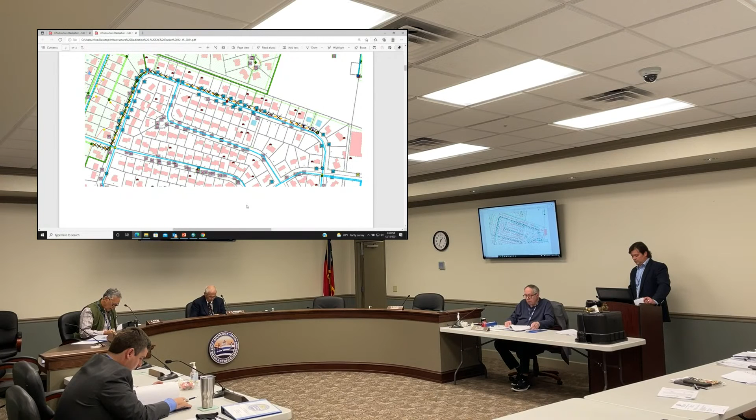I found it kind of interesting when I looked at this. What'd you call it, Pediatric Surgery Center? Dentistry. Dentistry, okay, that's right in the middle of a subdivision, even though the driveway's on Altama. It's kind of interesting how that wound up, but that's a city issue, not mine.

So this is literally just the section from the edge of the right-of-way to connect to the public system. Yeah, we asked that question too, and they were even successful in getting a curb cut. I think they were just outside of DOT jurisdiction, and they squeezed it in there, but hopefully it won't affect the residential area right there.

Is this close to where we did not reline that pipe that we were going to reline, across the street? It is. Now, we do have a separate motion for this one over the other one, though. We did, but the way the motion's read, I agree with Commissioner Duncan, we could probably just say it was already approved. So we're going to call that one approved as well. Okay, great.

That's a very nice looking facility that's out there now, the dentistry office. Is that it? They can charge more money.

Next item is the USGS joint funding agreement. Since 2014, we've been entered into a joint funding agreement with U.S. Geological Survey to study the migration of a salt plume in the Upper Floridan aquifer, and the migration of chlorides throughout the system. This is key for our long-term planning to determine if saltwater intrusion is causing any issues. Several years ago, we had to close down the Perry Park well site due to the increase in chlorides.

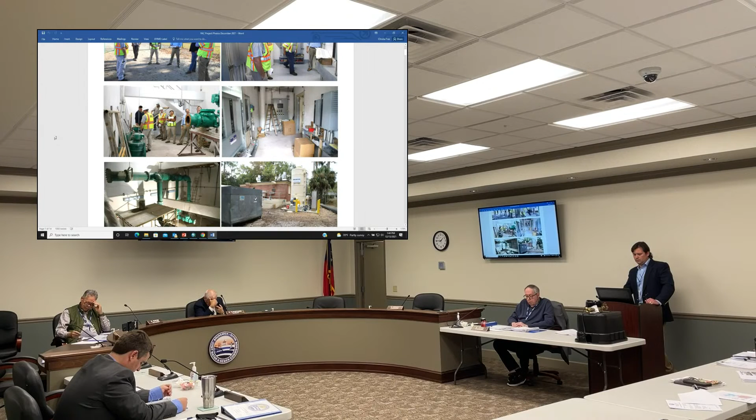Project 702, pump station 35 and 36. We talked a little before about it. This is a walkthrough meeting we had, a few pictures of that, electrical room, whatnot. This is before the pumps arrived at 35. We're down there in the dry pit room, electrical room middle right. At the very bottom, it's looking down at the dry pit or pump room where the pumps are going to situate, and that's the discharge piping, the green piping.

Then outside is a shot of the BioRem, which is the brand, but the odor control tower. It's also part of this project. Pumps for 35 showed up Monday, and the pumps for 36 showed up today, so we've got all the pumps on site now.

Bottom right-hand picture, are those power roof ventilators? What's that on top of the roof? That is ventilation, yes. Are those fans? Are they the blowers? Yes, sir, for air exchange. Those are just exhaust fans, aren't they? But are they like power roof ventilators? I've never seen something that looks like that.

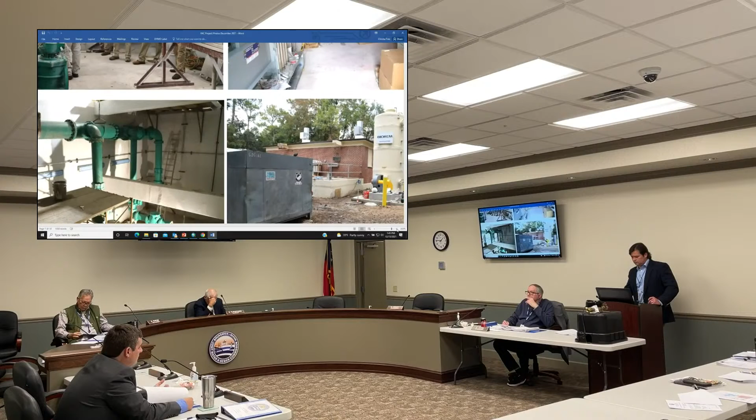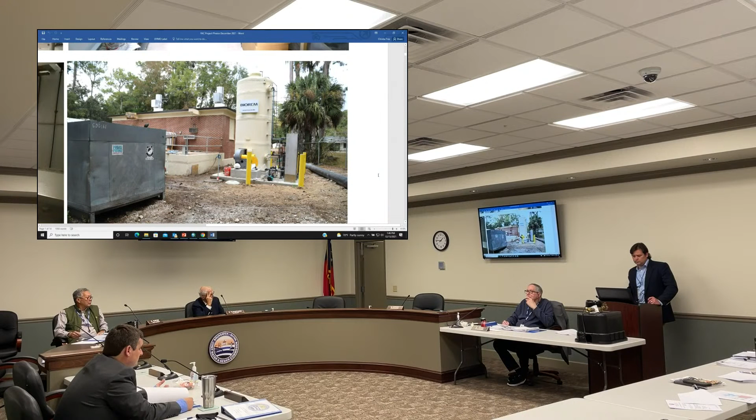Well, a little at a time here. Oops, wrong way. Other way, there we go. Can you zoom in? Have you zoomed? I'm at maximum zoom, Captain. There you go. That's as far as we can get in this picture, but we do have more pictures, we can get some better pictures.

Now, what you don't see here is also, there's a solar panel up there now, a couple other things, up on top of the roof. It's actually on that beam right here. The solar panel, what's it for, what's the purpose? It's to keep some batteries, some backup batteries inside, charged.

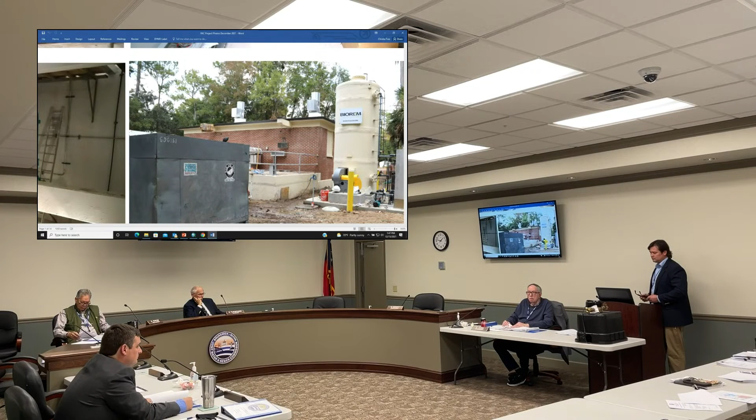Yeah, for SCADA and whatnot. Is that standard equipment now, the solar panel? It was engineered and designed into this one. Is it going to be at 4036 too? Yes, sir, it's going to be done the same way. Does it do any emergency lighting also, or just the batteries? No emergency lighting.

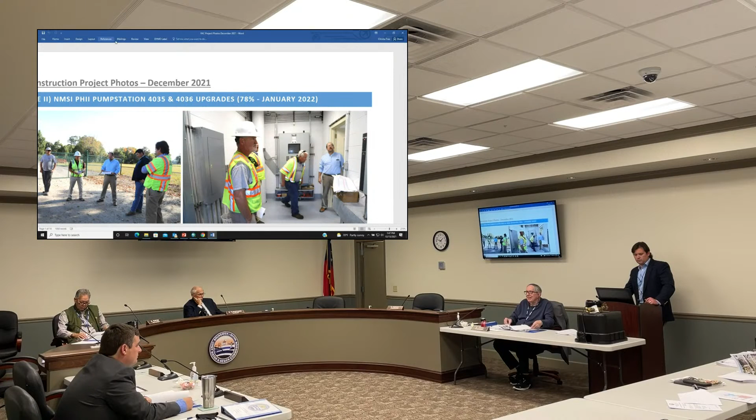All right, now you got to unzoom. Yeah, let's see what I can do here. Back out to, there we go.

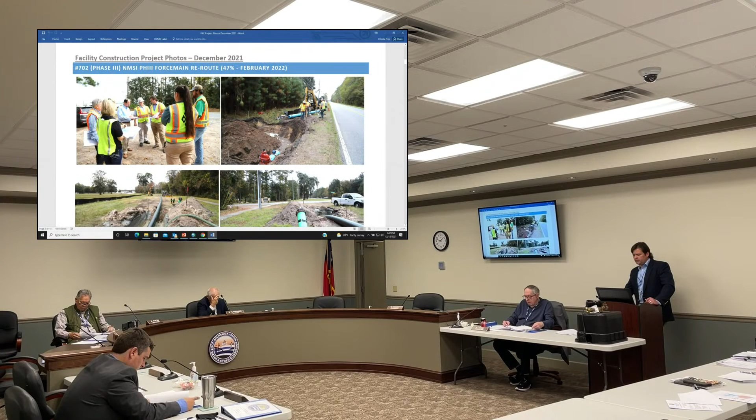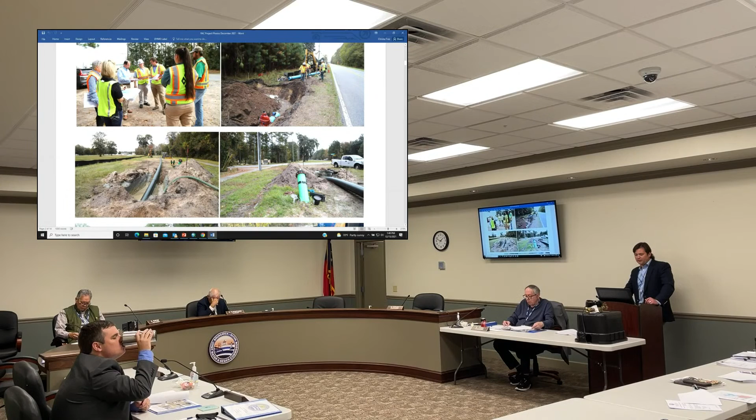Okay, and related to project 702 is the force main extension. Again, this is just a typical project, bi-weeklies out there. You can see construction going on, pipe install, force main install going in along Canal Road. This segment of Canal Road is currently 2-lane, it's going to be 4-lane, so as part of our design we had to accommodate the county's proposed plans. So you'll see fittings and zigs and zags in our water line where there's no conflicts at present, but the county assures us one day there will be.

And the force main pipe, you can always tell the difference between, at least the way we specify pipe, green pipe is sewer or wastewater, and blue pipe is potable water. So the two pictures in the middle, you can see the force main going in, another one stubbed out.

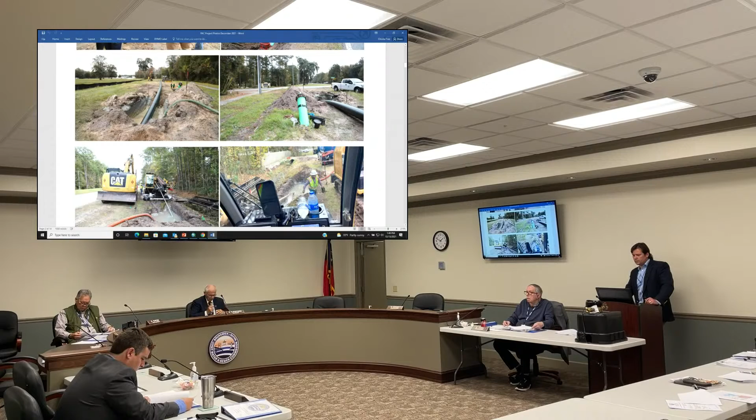Did they use some of our pipe and pay us back on this job? Because I don't think we loaned any pipe on this project. They didn't get delivery on some of their pipe, that held things up. We offered to provide them with some of our inventory pipe, but their pipe showed up in time, so they didn't use any of ours. And the pipe is all the same color? Yes, sir, because at first we were concerned we might have different color pipe. It's all C900 for the water, 12-inch C900, and the green pipe for the 12-inch, and then the green stripe pipe for the 20-inch, 12-inch HDPE that they pull through.

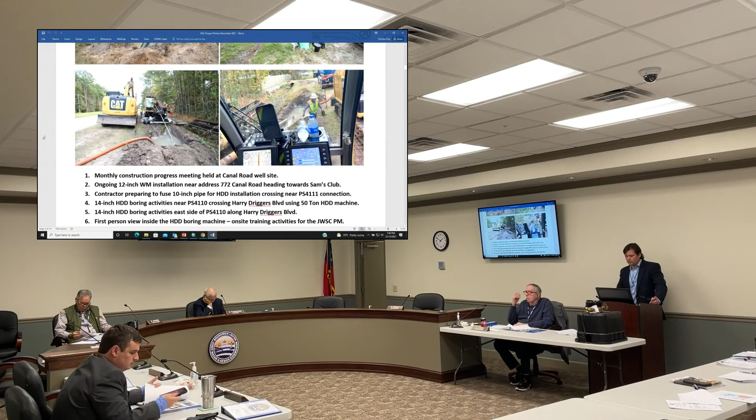So that's their smaller machine there. That's a 100,000-pound machine. And then they're going to bring the big machine, which is the 100-ton machine, coming in here to do the final pulls underneath Glynco Parkway and the last other couple pulls through there. So it's pretty neat. It comes in on what looks like a semi-trailer when it comes in. It's literally that big.

But that's ongoing right now over by Air National Guard. If you go out there right now, you'll see them out there working. So just a few more feet to connect the water main on Canal to where the storage building business is.

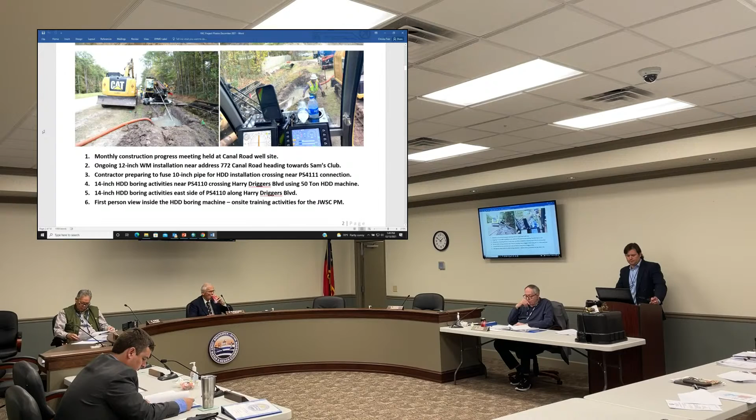Okay, next project is 704, which is the water main project happening in the same general area. This is the water main connection from the Canal Road, Harry Driggers, Glynco intersection to the water main that's there by the airport, across the entrance from the airport. This is going to loop that system in. TB Landmark, same contractor. The project was bid out.

We got pricing and whatnot. Same contractor doing our drilling on the North Mainland project, also put these two stub-outs underneath the FLETC driveways. And that job's complete now, just some final testing.

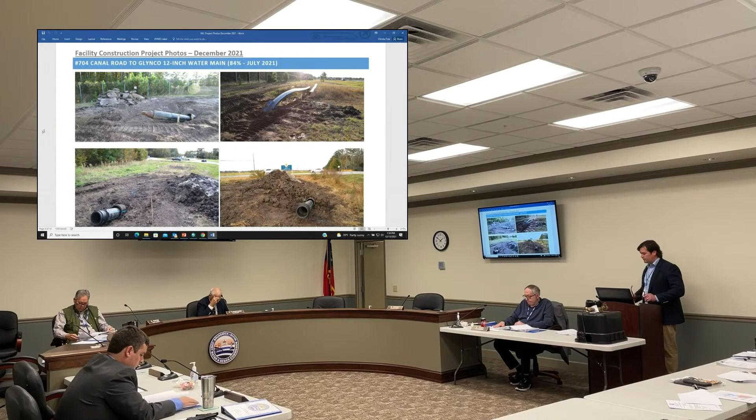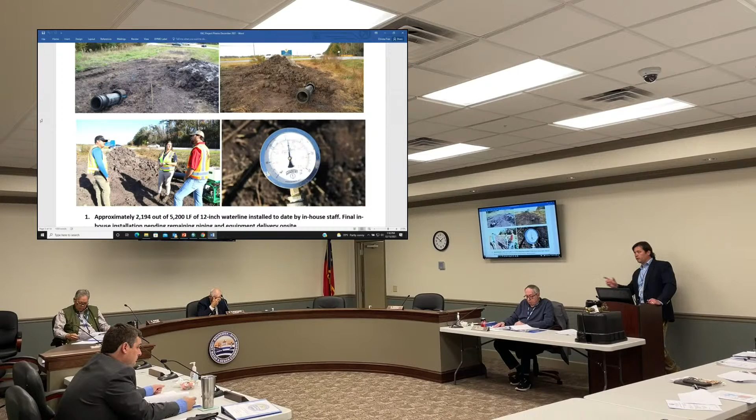They've been all pressure tested and everything like that. We're working through the bacteriological testing for those now. And once these guys are out of the way, in-house forces for water distribution are going to make the final direct bury installs to connect these all together. Overall, it's an in-house project.

Okay, project 906, Academy Creek improvements. Yes, sir. So we've finally had stuff start showing up, which is a good thing. On the picture there on the left, they're starting the install. You can see the new live bottom bin at the top of that picture, sitting on the surface there.

Fixing to be ready to be installed. That is to offload the sludge from Dunbar and Southport. The canopy has been installed over the filter structure, and it was almost complete yesterday, so I suspect it is complete now.

They've also been demoing the existing gates in the splitter boxes, and we did have some gates show up, so we've got new gates in splitter box B, new gates in the headworks, and they've installed, even though it's not hooked up yet, new gates in the new splitter box on the pre-aeration. So gates started showing up, so we'll be able to put clarifiers 1 and 2 back into service on Monday, which will be a great benefit to see how those new feed wells and baffles will assist in that.

The primary effluent lines leaving the splitter box are being installed, but they ran into an unexpected electrical duct bank. There's some 480 in there that's got to be rerouted so that we can continue the dig there. It did not appear to follow any plan, because based off the way that duct bank was poured, I can't imagine any engineer drew that.

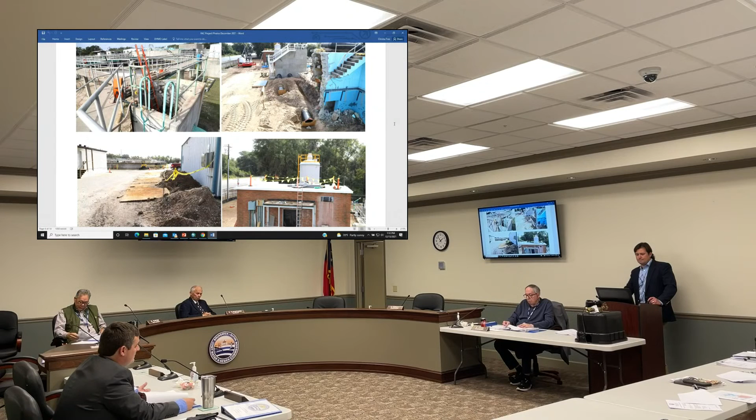The filter structure is essentially complete. A little more electrical that's got to be done there, but we're waiting on the Aqua-Aerobic rep to be freed up to actually do startup, which theoretically will be sometime in January, so the filters can be brought online.

But we do have the gates installed there now, so we could start that out. The gates for the filters have not been installed yet, but to my knowledge, they're here. We just can't do startup until the end of January, so they've started working on some other items since they don't want to have it just sitting there.

You mentioned the 480 volt circuit that was found. After we finish this major renovation, are we going to have an as-built that shows all the discoveries? We will have a new as-built that shows the discoveries, so that the next time we do something, we'll have better data.

The 480 volt line we found went into the bottom of the old grit chamber. There were some blowers down there, but it's not needed any longer because that structure has been torn down. So we just have to go back to the switch gear, flip it, disconnect, pull it out, and then they can rip the duct bank out.

We also have to provide some 110 power out to the flow meters on the influent that were being fed out of the bottom of that building, but that was already going to be done. So they're going to temporarily provide power for the flow meters because maintaining that is a permit requirement while they're doing the work. Our electrical sub is working on that now.

So there are blowers underneath the old grit chamber? There were blowers, yes. Probably, if I had to assume, they're being recycled for the copper out of the motors right now — those windings are valuable. Sure, that's true.

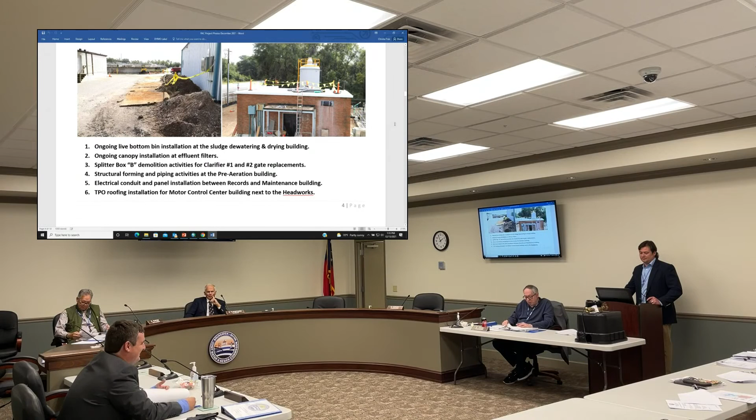So the completion date here is really just based on — completion date right now is end of March, early April, but full disclosure, that is 100% dependent on when the screens show up for delivery. And when I say dependent on the screens, they can't do the odor control installs until the screens are in place, because they have to custom cut the odor control covers once the screens are in place. So most of the work at Headworks is held up by those screens.

I'd say if we get this done by early summer, it'll still be a great success. Luckily, we allowed them 18 months on the contract to start with, even though they really only needed 14 months, so we've still got plenty of time in the contract at this point. Hopefully we weren't going to need it, but it looks like we may at this point.

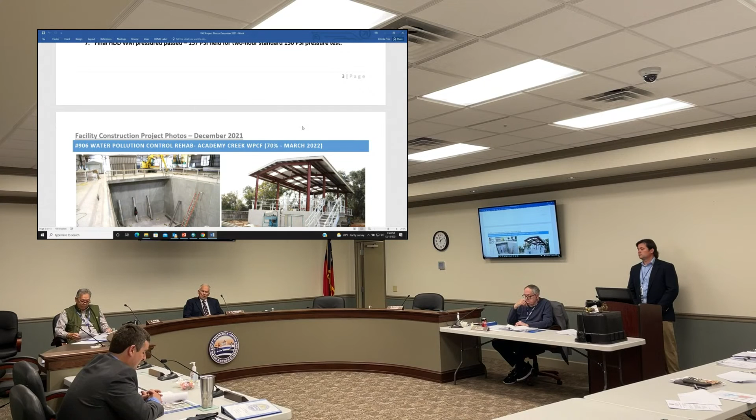Update us — there's two other things we're considering here, the admin building and also the UV system. For the UV system, we ordered a change order to the engineering contract last time to design that. They're writing up an owner-procured equipment RFP so we can get proposals to review and purchase that. Talking with the existing contractor, it's going to depend on whether they still have plenty of work to maintain that whole time, or they may want to demobilize, and we may have to bid that out separately to get the UV system installed.

For the admin building, I spoke with them about this literally yesterday, and their preference is — they're still interested in doing the job, but they think it'd probably be better for both parties if that was just bid out separately rather than trying to change order it to them at this point, because they think it's a different style of work requiring different resources, so they would recommend us just bidding that out separately.

I will say, part of the reason I think our contractor feels that way is they just won a very large contract up in the Savannah region. So they're having some of those resources that they were keeping for us — but some of those resources have since been reallocated.

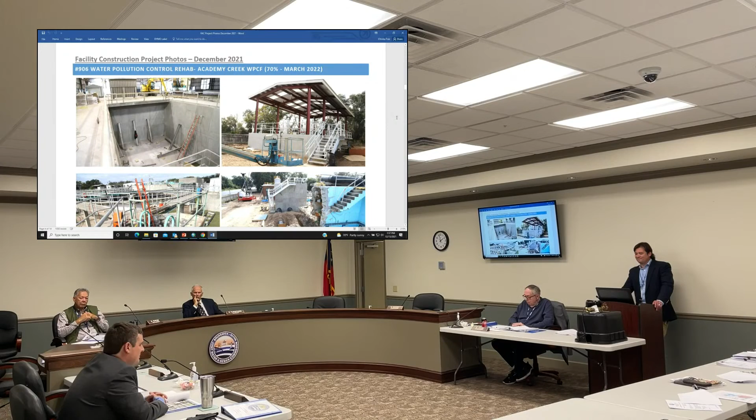However, we're still keeping our site superintendent, Mr. Allen — he's still going to be there. Good deal, as long as he's there, we're in good shape. That's good, he's a good gentleman there.

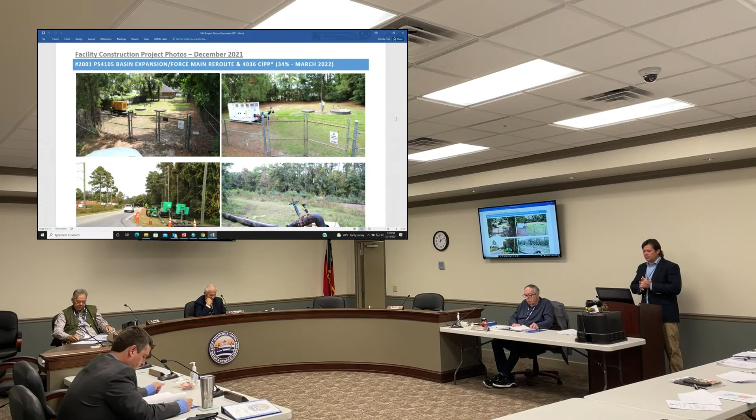All right, Pump Station 4105 basin expansion and 4036 CIPP. So we spoke some more earlier about the lining work going on for that project. These shots here are of the bypass by Rich Products off of Glyndale — that's one of the bypass setups there they were pulling from.

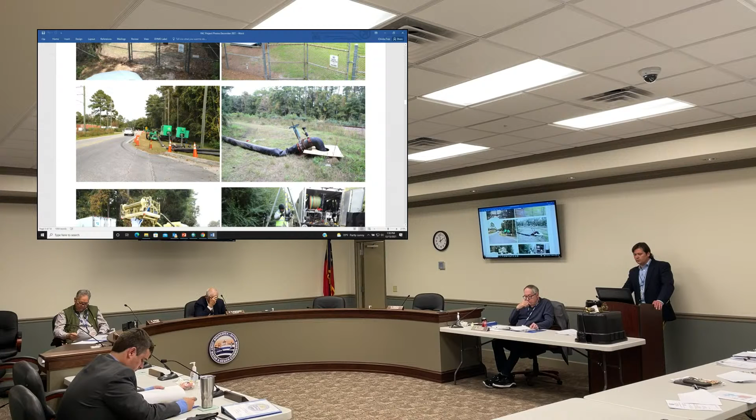You always have to bypass the sewer around the lines that you are lining. What you see here is a discharge point, in the middle left picture, discharging to a gravity manhole alongside the tracks right there. Just south of here is the trestle that goes across the canal, to give you a location. That's the setup you'll see, and you'll see it tonight as well — if you drive through exit 36 tonight, you'll see something very similar to that.

They have what they call reefer trucks, where they keep the cooled bag — the resin-impregnated fiberglass liner — nice and cool until it's ready to install. This is how they do it: they invert the bag, kind of like taking a sock and rolling it inside out. As it rolls out, it moves forward through the sewer pipe, and then your liner is there. Then they fill it up with boiling hot water and cure it that way.

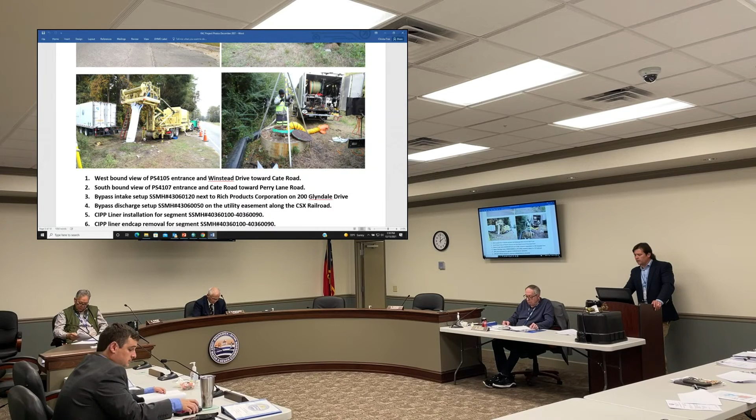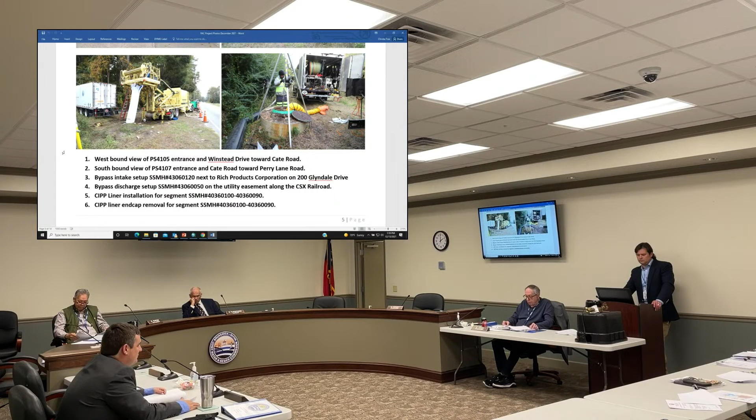So a lot of things have to go right, as you can imagine. That is a fabric material, and you can get wrinkles and whatnot, so it takes a lot of care. They do also other CIPP you can do with UV curing or steam curing, but on these size lines, really the only way to do it is to fill it up with boiling water and let it cure. So they take a while to fill up a 24 or 30-inch pipe and hold it for cure time. That's why some of these take 24, 36 hours to actually line, because it takes a while to do 500 feet of 30-inch pipe.

All right, next project, Bergen Woods off-site force main. Our force main is all installed and in the ground. They had one little testing issue on the very last segment, the connection to the receiving manhole at Cate Road, and they resolved that. They found where the leak was, repaired it, and got a passing test on the force main, so it's good to go now.

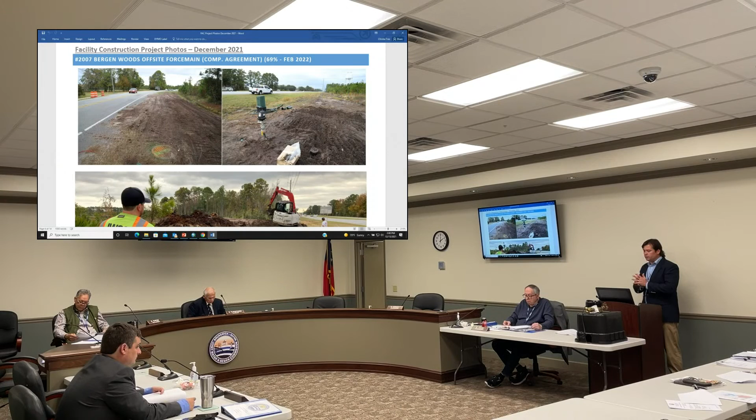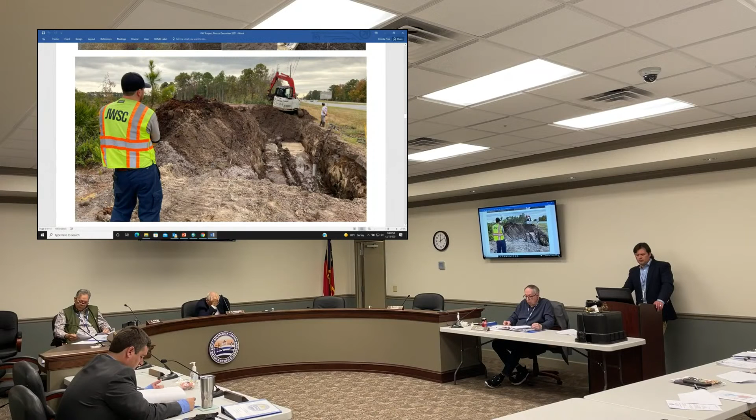The top right photo is an air release valve. All it does is allow the gas that gets trapped to escape. Sometimes the gas that comes out of the wastewater stream collects as a bubble in the force main, and these relief valves just allow that bubble to escape so that your fluid movement isn't impeded. The middle picture is Mr. Taylor, one of our construction inspectors, watching the final tie-in construction going on there, right in front of Bergen Woods, where they're tying it back into pump station 4116.

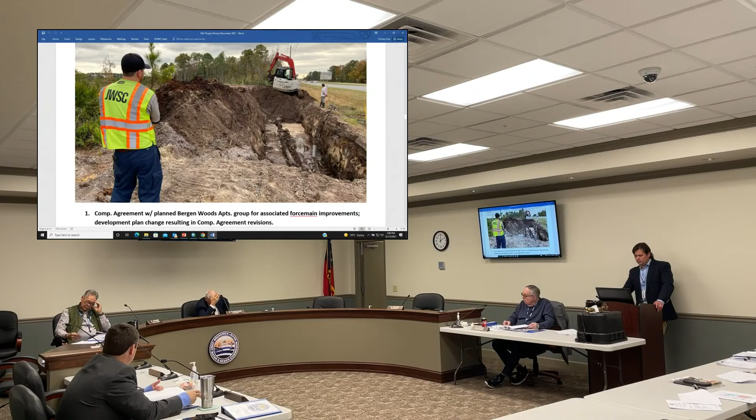That tie-in's been made, right? Yes. So I'd go back to the air release valve. Yes, you got the air release valve. What's the green box behind it?

There are two options we use with air release valves. Sometimes they're installed underground in a manhole structure, a precast concrete structure, and sometimes we allow the use of pedestal types. It looks like a telecom box. So that box goes over the pipe sticking up there? It goes over the ARV, yes, sir. Correct, it'll go over that, and it's kind of like a hot box in a way too. It's a vented box. Do we have a filter or something on that too?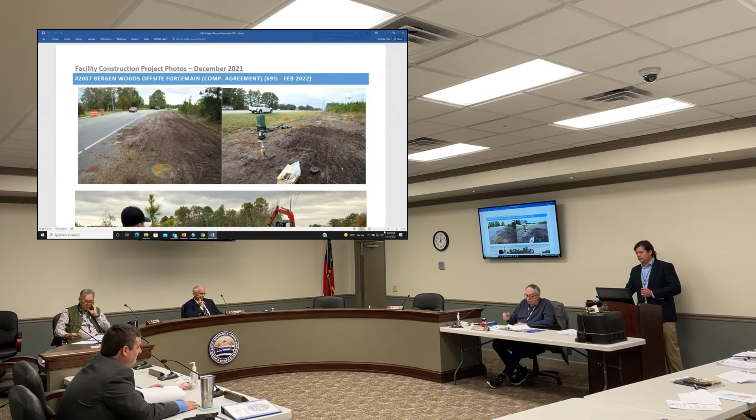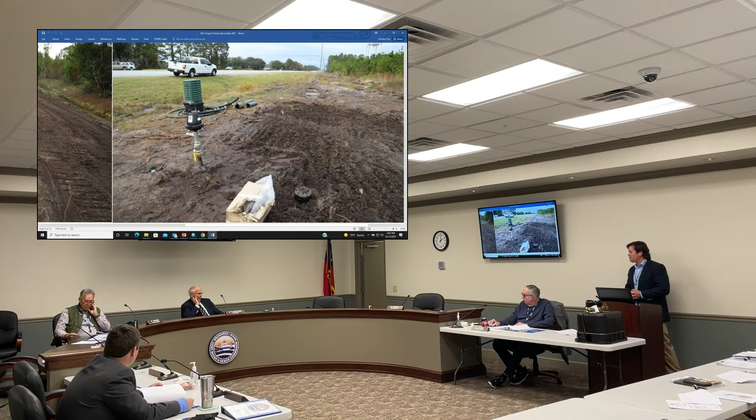These won't have any filters on them, as far as a carbon filter or something like that, but you can certainly get them. In the location this is at, if we experience odor issues, we can certainly retrofit it with one. So would these sometimes have odor issues with air release valves? It can happen, yes, sir. The gas, the air that's escaping, can have odor to it, very likely to. We allow both kinds in our standards? We do, it depends on the location.

Operations like these because they're easier to maintain. A lot of times the ones put in the ground are often forgotten about, and the ARVs do have to be maintained and replaced. When they malfunction, they don't let that gas bubble escape anymore, and that can really affect your hydraulics. So sometimes being on-site is a good thing for maintenance reasons, it makes it easier, and it keeps it out of the water. Sometimes they fill up with groundwater.

But that pipe could be full all the way up almost. I wonder if these are as efficient, because the pipe's 3 or 4 feet deep. Correct, yes, sir. So most of them would be right on top of the pipe just about. Correct, so you've got about 6 feet of pipe perhaps coming out.

That's one of the other features of using this option, is that if your force main's in an area where you can't install a manhole, or it's not a good location, like in a sidewalk, you can reroute your poly pipe off to the side and mount your pedestal out of the way on the shoulder of the road or edge of the right of way, back against the wood line, something like that. Are those sewer air release valves? Yes, sir. Yes, sir.

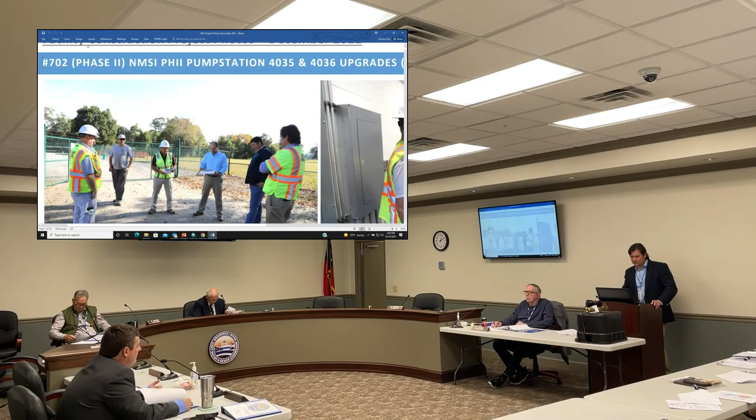Go to where? Down to the left, up and to the left, on the taskbar. There you go. Read mode. Go to edit document. Let's jump back here. There we go. Hopefully that did it.

Can't expect engineers to use technology. We can tell you what to design, man, but we can't use it.

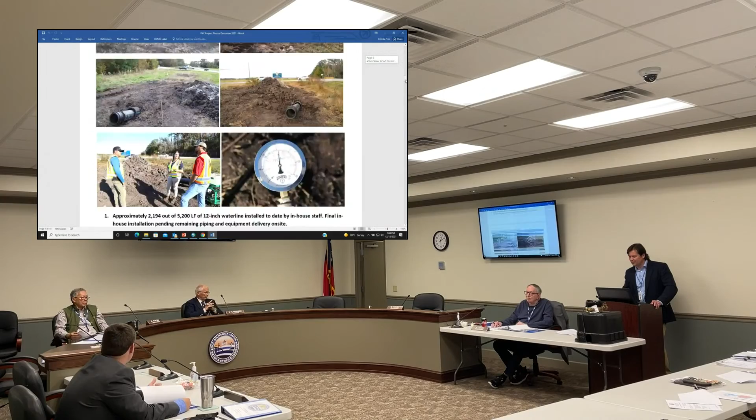Gotcha, all right cool. So here we go, connections made, so that's a good thing. This force main is going to serve not only the safety complex pump station, which is very close to being complete. I think within the next, we're going to be doing a startup. Startup's Monday or Tuesday, yeah.

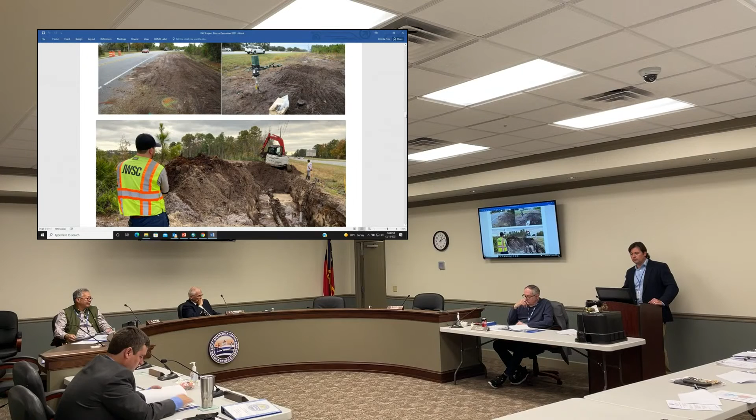Several of these projects are going to wrap up very quickly here at the end of the year.

All right, here is pump station 2002 force main replacement. So when we last met, we were talking about the construction bid we received was much greater, I think, than was anticipated, and so it was decided by the commission to reject the single bid, go back and take another look at things. The board actually even asked if we could go back and do an evaluation on the force main and determine, is it just segments that need to be replaced, is it the whole thing and whatnot. So we did this evaluation.

If you may remember, it's called Smart Ball. We did that on the 4002, 4003 force mains. Got a lot of good information on that, and that actually allowed us to postpone the replacement of the 4003 force main, which was a good thing, and focus on the improvement to the 4003 pump station.

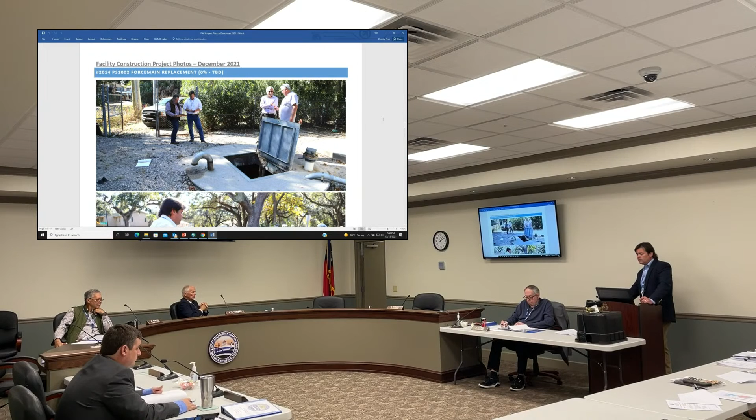We are getting pricing on doing that same technology or evaluation on the 2002 force main, as the board showed some interest in that. This company we're talking to is the same gentleman that helped us with the Pure Tech. He's now with a different company, Smart Ball, different company, very similar technology. We're going to get at least two prices and see where we go with that. Hopefully in the first quarter of 2022, we're going to have the evaluation done.

All right, and this is just a shot of the receiving manhole here at the East Beach and Demere Road traffic circle, if you've been through that area. I love to showcase this one. This is the HDPE manhole that we worked with the county to use when they did their traffic circle improvements. If you ever get a chance or want to go there and take a look at it, I'd love to show it to you. This thing's working like a champ.

You can have the inverts built any way you want to have them done. The poly material is impervious to the sewer environment. And when you see there's 4 different flows that come into this manhole, this confluence manhole, the troughs just make them work right in. It's really nice, it's pretty cool.

Force main tie into that manhole? Yes, sir, the 4001. For the project we were talking about, it comes here. The road force main doesn't - there's a fitting in Demere Road where it's already been replaced with PVC from that point down to the roundabout. So we weren't going to replace the PVC section, we were just going to do the ductile or cast section we're tying into the force main, at on Demere, on Demere down and on Mallery down, right there, yes sir. Demere and Mallery, that is where it actually discharges at - this is the retrieval point where they would retrieve their instrument.

And what side of the street is that on Demere? On Demere, this is on the airport side. Yeah, but is the force main on that side too, all the way up? It's on the east side for the most part, almost the whole way. Yeah, you got 4001's force main, 4002. There's a lot of stuff coming together at that intersection right there.

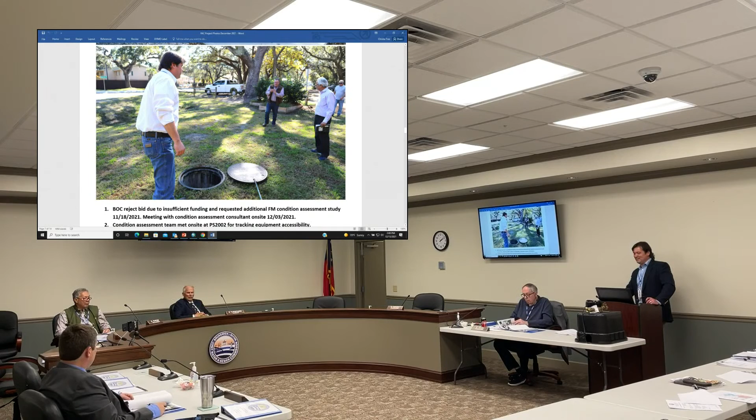And we do something similar. Do we have a layout of what it's gonna look like? I haven't seen a layout of the traffic circle up there. I haven't, we've asked for concept, but we haven't received anything yet. They haven't produced anything since the 2015 pond study.

So, definitely looking forward to it. A lot of opportunities for improvements there as well. Looking forward to working with it. No capacity improvements, just condition. Correct, infrastructure condition improvements, yes. Condition and location improvements.

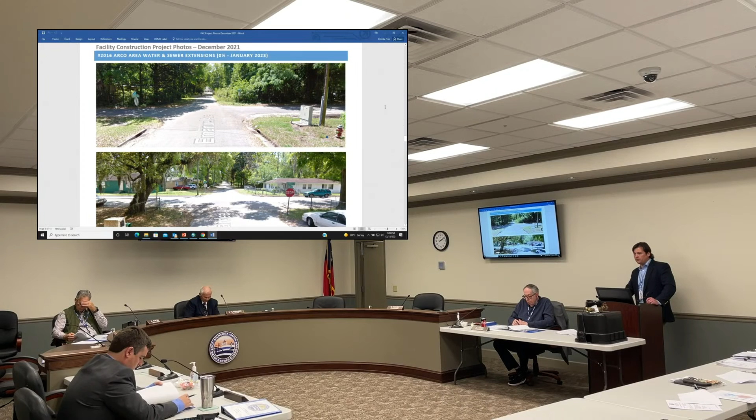Next project on the list is Arco Area. We're in the construction phase of that project. I think we're working through the final pieces of the contract with UWS. Do we have to get any easements on this? There weren't any easements on this. They eliminated easements. We had to get some construction easements, but yes.

When are we gonna start work on that? The kickoff meeting was scheduled for 12/14, but got rescheduled for January 4th. So, let's be honest, if they order pipe at the kickoff meeting, you're probably looking at March before they get started, just because of pipe delivery dates.

Does the contract say where he's gonna store pipe? We haven't determined that yet. There's some opportunities. I mean, at that park there, Perry Park maybe, or yeah, we'll figure it out. We've got plenty of locations they can use. The city will work with us too, I believe.

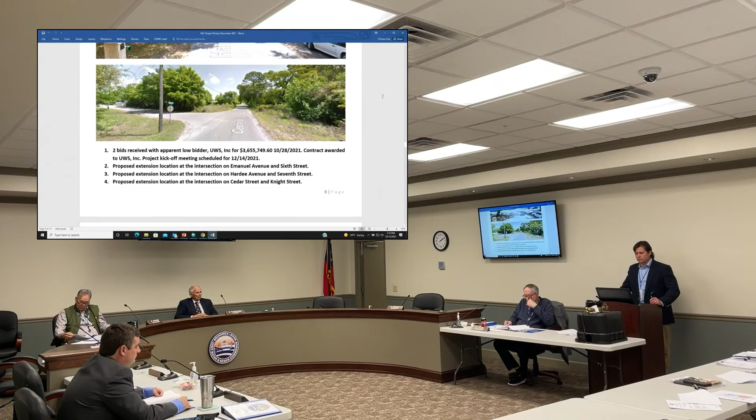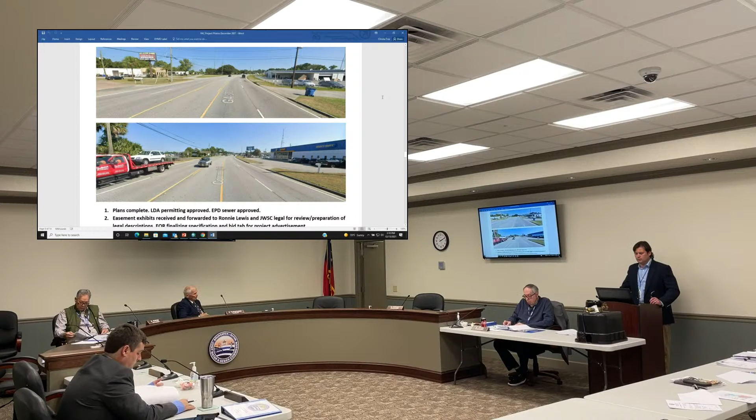Okay, Community Road sewer expansion. So we're going back, taking another look at this one to see if we can incorporate lowering the existing pump station to try to look for a better option than some of the less desirable ways we've got it right now, which is large diameter sewers or flat grades and that kind of thing, and see if we can better serve that area, but also get a pump station improvement out of it. So we're taking a real hard look at that one.

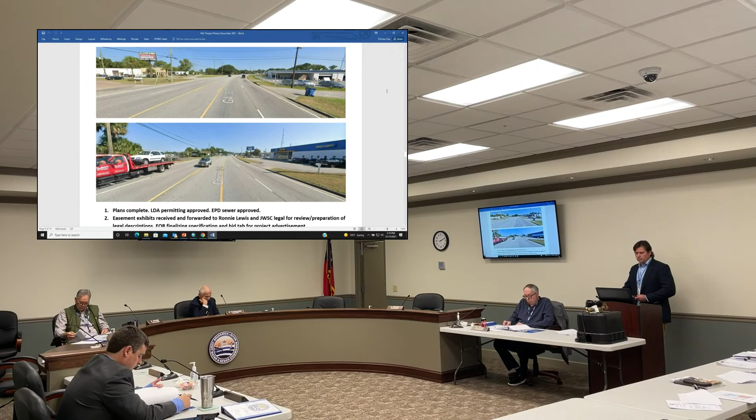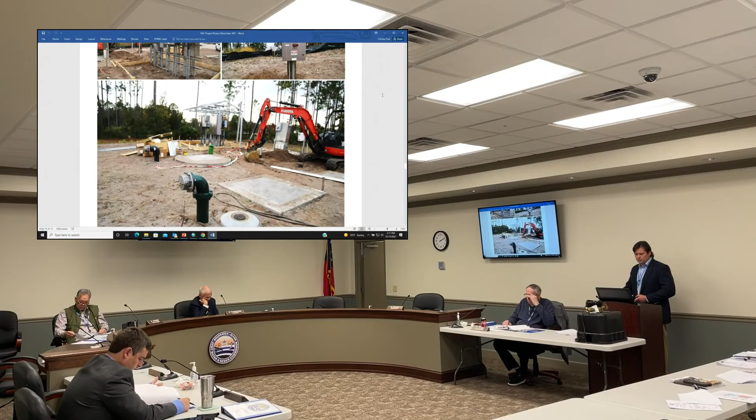Okay, we're talking about 4116, the safety complex. Just some good pictures of that, it even looks a little different now. This was pictures from last week. Power service from Georgia Power being relocated. In the top right picture, it was a 6x6 post before we had the new drop put in. I think it was truly a temporary service.

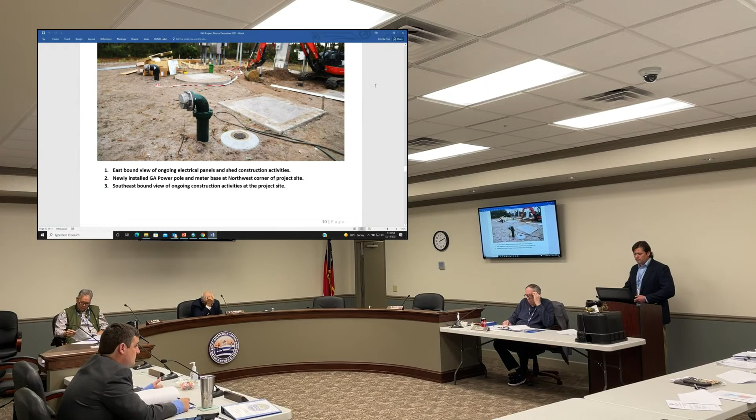And just a shot of the site. The site's been lifted, we've got about 2 foot or better of positive elevation from the surrounding area now. Contractor worked with us really well to do that. We provided the dirt and they simply installed it, spread it out while we were waiting on the pumps and the electrical components. Like I said, startup schedule for next week on that right now. Correct.

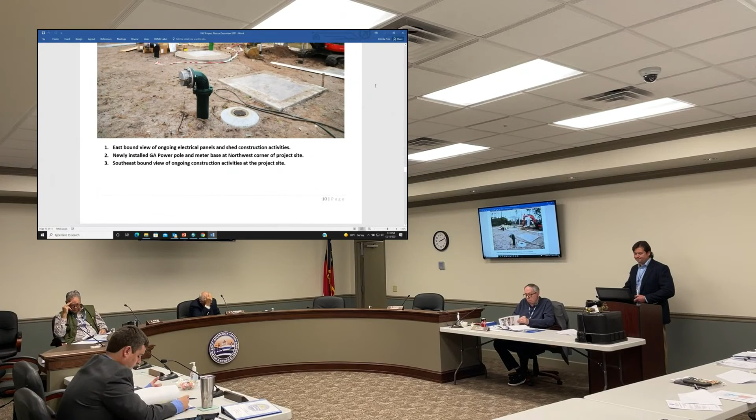All right, Canal Road Water Production Facility, existing well. We're going to demo the existing buildings and whatnot out there and install a new water production facility very similar to Ridgewood that we finished up last year, about this time last year.

The kickoff meeting with the design team, we've had that meeting, it was on the 2nd of December. And we do have the minutes back now from that. We're looking for the concepts to come back from them, survey to go and start being performed and whatnot too. And we are going to have to obtain this lot from the Glynn County / Airport Authority as well.

That site's currently being used as a laydown yard for the North Mainland projects. So they own the site where this well is? They do, they do. And we've already met with the Airport Authority, and Glynn County's already talking with JWSC Legal, working out the details on that.

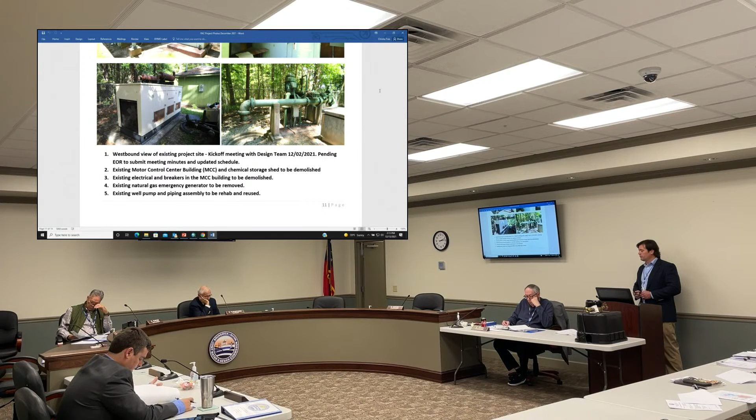What we're defining, once we get into design a little bit, we're going to define exactly the size of the parcel. We're actually going to get a little bit more than what's within the fence out there now. And by the time we put a ground storage tank out there, we're still sizing the ground storage tank. The engineer's taking a look at all the design parameters for sizing that tank, and then we'll know what size footprint of property we need.

So it's a fire well right now? It was originally designed, we understand, as for fire purposes, fire well purposes. And it had chlorinating facilities out there. I think it had a hydro tank.

Do we ever run it? Yes, sure, it's run weekly. It ties into our system. Yes, sir, it is a permitted well, it's on our permit and everything.

Now Ridgewood, did we run it weekly too? Did it have chlorine facilities before too? No, sir. Where did it discharge then? It went into the system, but there was enough chlorine in the system that the residual was still fine.

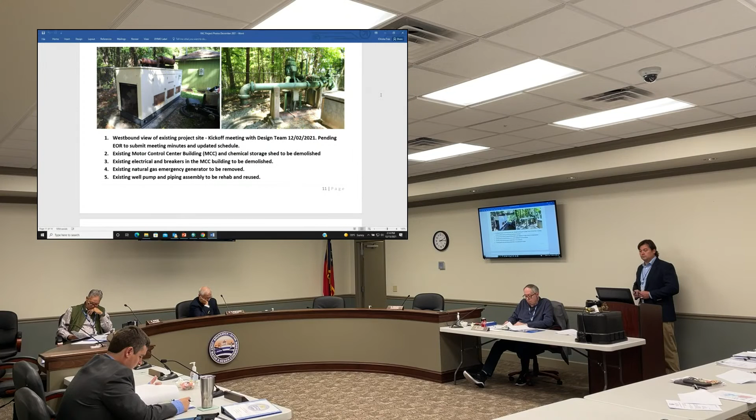And the one down at Southport, we run it too? The one at exit 29, we do not run the one on the plant site every week. And if they're a fire well, do they kick on automatic if we have low pressure or something? No, sir, we have to manually turn them on.

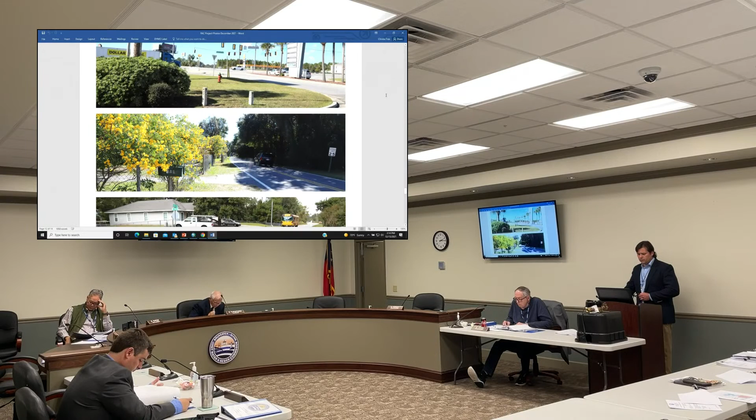North Mainland water loops. This is with Four Waters Engineering. We did have the kickoff meeting with the design team back in November, and they are working diligently to get us our first alternate options to take a peek at. We should have those probably this week. Those are at Millennium, Golden Isles Parkway, kind of near Toucans, or Strike Zone area, to loop us across the spur.

Also at Hautala Drive and Old Jesup. Then also another one, Old Jesup and Bailey Road out there towards Tractor Supply.

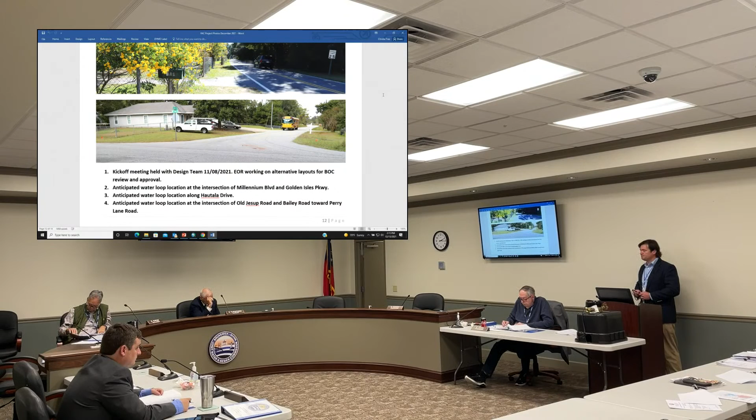Okay, 3 pump station upgrades. We just had our pre-proposal meeting yesterday on this project. I think we had 18 for how many? Something like that, somewhere in that ballpark. Yeah, I think we had about 18 people, either via phone or in attendance in person here.

Pretty good turnout. We visited the sites. We started at Pump Station 4002 right down here in downtown off Mansfield Street, then went down the street to 4001, and then ended up at exit 29 at Pump Station 3101.

Can you explain to us what we're doing at those 3 stations? These stations, it's not really capacity upgrades, it's all really condition-based upgrades, but at the same time we're looking to make sure the pump upgrades and whatnot meet what's recommended in the master plan. So electrical is a driver. These 3 were all listed in the master plan on the electrical needs assessment as being at the end of their useful life, so electrical mainly.

Mostly electrical, and while we're in there, depending on the condition of the piping, we may replace the discharge piping, and we may go ahead and replace the pumps on them, just because these pumps have got some wear and tear on them.

Todd, why do we have roofs over some of the motor control and control panels and others we don't? The one at 3101, that's a new panel set up right there. They installed it, and that one's going to get a roof from what I understand. It's just not installed yet, it's going to get a roof over the top of it.

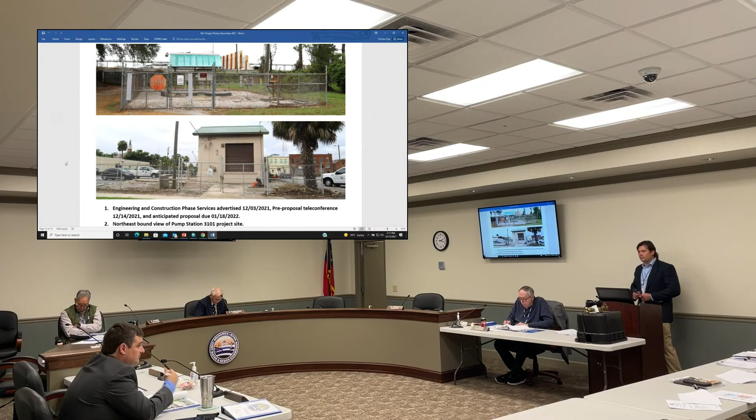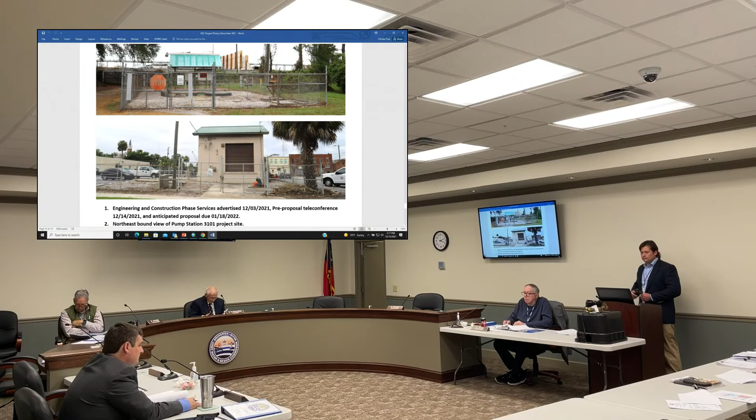Roof is likely going to go away too, I think it's deteriorated. Probably very similar to what we did at 3. The roof is also, I think Kirk even pointed out to the group yesterday that it's blocking the ventilation. Unfortunately, yeah. So we're putting it back to original.

If we're talking about electrical, what about, do we have a generator at 4002? No, sir. Just a connection for a generator? We don't have connections for a generator.

Well, that's a big pump bypass station, isn't it? That's our main pump station. Right, we have bypass connections there, and we can locate a bypass pump there, typically during major storm events.

What's the status of our generators? We are trying to get a bid out for purchasing the generators, still trying to locate exactly where we're gonna put the generator for the ops building. So much stuff in the ground right there, and that's a big generator, trying to figure out how we're gonna locate that, so we're gonna pre-purchase the generators while we're figuring that out.

Because according to our electrical engineer, you're probably looking at 6 to 9 months delivery on generators right now. So we haven't bid them out yet. Hopefully getting bid out before Christmas.

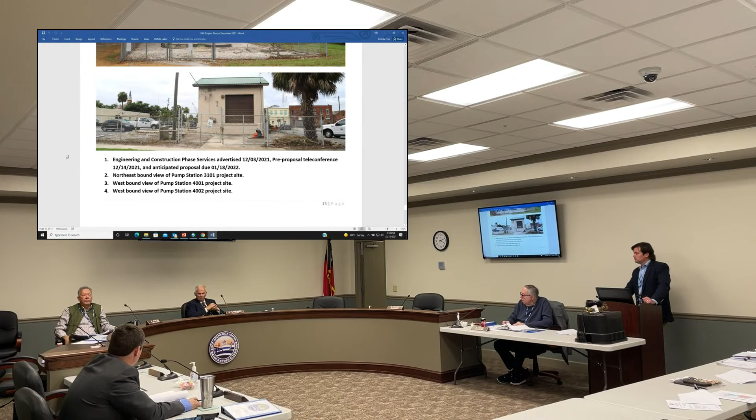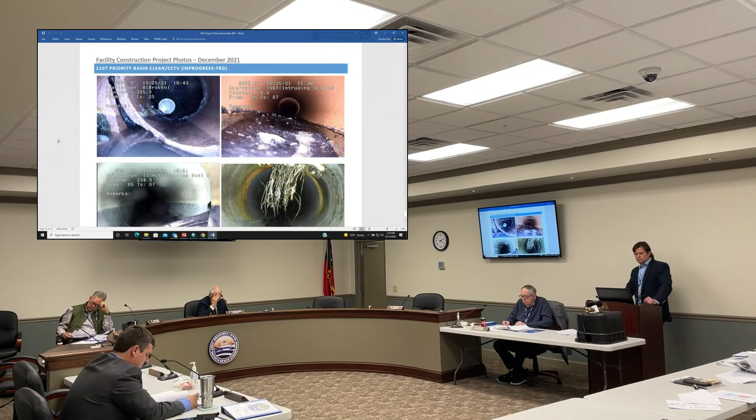They've finished about 36,000 feet to date, as of last week. It's about 70,000 feet in the contract, so they're a little over halfway, and they've been working this week. They're averaging about 5,000 feet a week.

Tell us where this basin is. This is on St. Simon's. I believe the 4035 basin is the one coming off Ross Road. The bottom right picture is that area on Glen Haven right in front of Dunbar Creek, some of the smaller lines, not the 24-inch that comes down Atlantic, but some of the 8-inch lines that run out the rest of Glen Haven.

Well, they're gonna be doing something on Atlantic too? They're not televising Atlantic because we just had that line done 4 or 5 years ago.

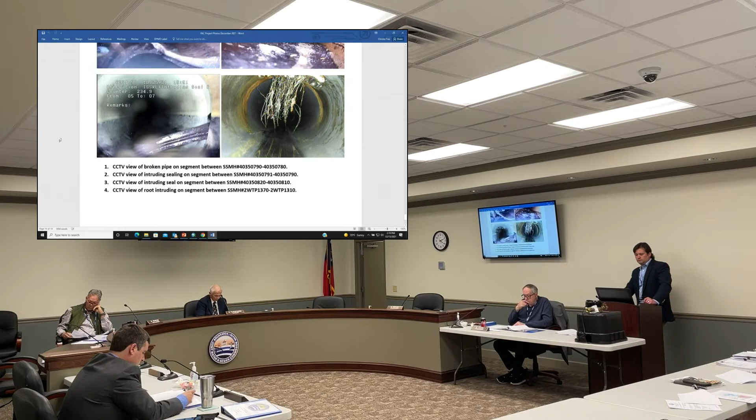All right, that concludes the construction projects in progress, and I believe we have a very cool presentation on the meter project, from Ms. Roberts. I will yield.

Don't oversell it though.

Commissioners, at last month's meeting it was requested that some sort of demonstration on either the meter or the system used for the meter data be presented to the commission. So I'm bringing you today a brief slideshow and some visuals that we can follow along.

You'll notice in front of me I do have a meter assembly and meter box, so we'll look at different aspects of that as I go through this brief PowerPoint presentation. Basically looking at the system overview, as a reminder, our goal was to achieve effective and efficient use of JWSC resources in gathering customer usage information and communicating that in a timely manner. That's the goal with this overall system view here.

You see a lovely graphic there from the vendor where the meter communicates with the tower, and that is a two-way communication. The tower then, through its gateway, communicates through the internet to provide that information to our Neptune 360 software, or we can also use in-field technology to directly input that information into the Neptune 360 software.

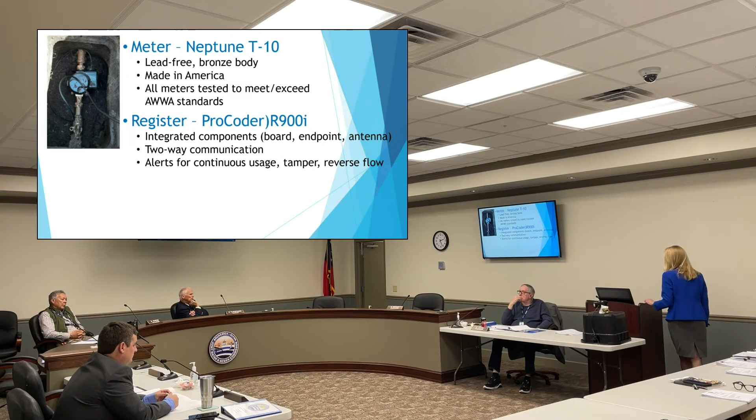Again, tamper—we don't want anyone tampering with the meter—and any reverse flow. Obviously backflow is intended to address that reverse flow, and if there's some reason we're getting reverse flow on these meters, we certainly want to know about it as quickly as possible so we can address that issue. The system will help us identify those very quickly.

And then for data collection, I mentioned this being an analog unit. Not only can we collect information from the fixed tower, but these also allow us to do the walk-by—literally lift the lid, read the meter as we do with the analog there.

We can do the drive-by. We have a unit that's about the size of, if you remember, the old style bag cell phones, with an antenna placed on the work truck. Drive by, pick up those readings.

We did that very intentionally because we're thinking, okay, we're in an area where unfortunately catastrophic events do happen and we're sometimes without power. So we want to have those fallback measures of being able to still go in and gather all that data. This nifty little unit will actually store 96 days worth of data. It will poll every hour and gather that data—2,304 hours in that one little unit.